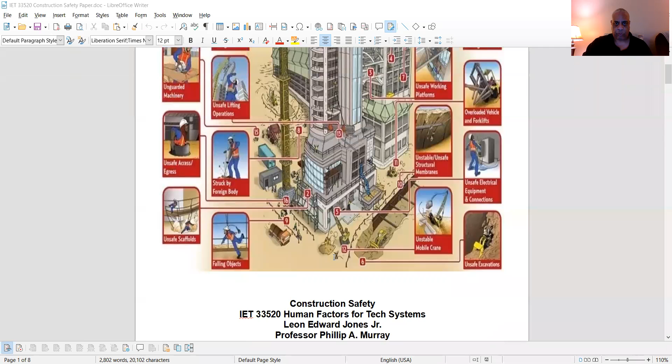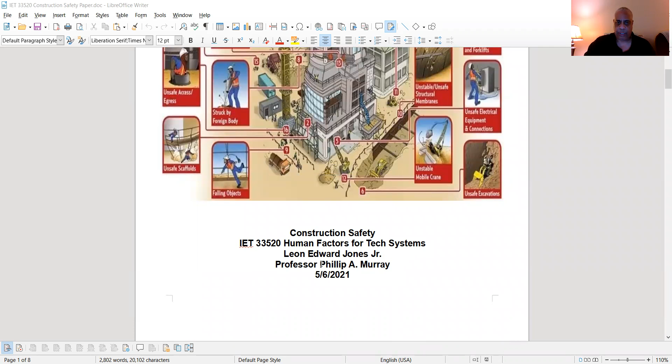But when it comes to safety, let me share my screen with you all. This is a paper that I wrote, Construction Safety, from my IET 33520 class at Purdue University, Human Factors for Technical Systems. I'm going to bring you the abstract, the introduction, the construction hazards, the comparison between the construction industry and the general industry, ways to improve construction safety.

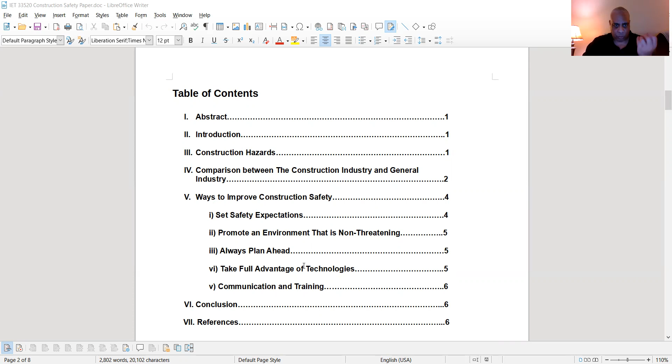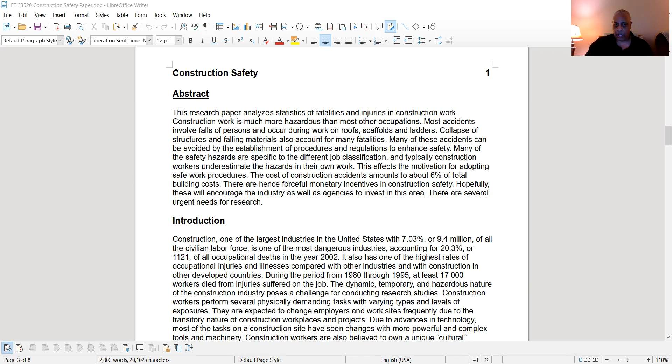I'm going to tell you how to set safety expectations, how to promote an environment that is non-threatening, also planning ahead, take full advantage of technologies, communication, and training. I'm going to conclude by summarizing this project on construction safety, and I'm going to show you all of the references I used to write this paper. So now we deal with construction safety. Again, construction safety is very pertinent. Let me open it up for you.

This research paper analyzes statistics and fatalities in construction work. As I said before, construction work is much more hazardous than other occupations. Why? Because most accidents involve falls of persons, and they basically occur during work on roofs, scaffolds, and ladders. Collapse of structures and falling materials also account for many fatalities. Many of these accidents can be avoided by the establishment of procedures and regulations to enhance safety.

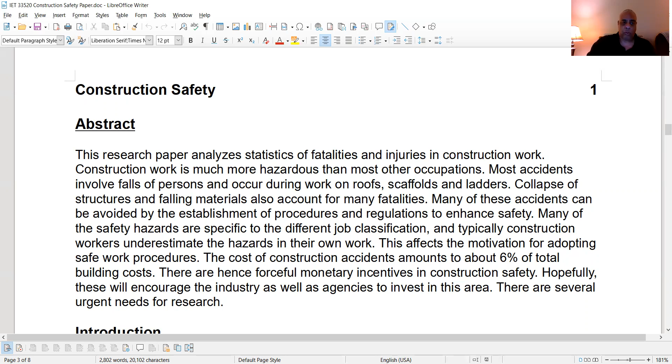Many of the safety hazards are specific to the different job classifications, and typically construction workers underestimate the hazards in their own work. This affects the motivation for adopting safe work procedures. The cost of construction accidents amounts to about 6% of total building costs. There are hence forceful monetary incentives in construction safety. This will help encourage the construction industry as well as agencies to invest in this area. So there are several needs for this research.

In my introduction, I tell you about construction. It is one of the largest industries in the United States, with 7.03% or 9.4 million of the civilian labor force. It is one of the most dangerous industries, accounting for 20.3% or 1,121 of all occupational deaths in 2002. It has one of the highest rates of occupational injuries and illnesses compared to other industries and with construction in other developed countries. During the period from 1980 through 1995, at least 17,000 workers died from injuries suffered on the job.

The dynamic, temporary, and hazardous nature of the construction industry poses a challenge for conducting research studies. Construction workers perform several physically demanding tasks with varying types and levels of exposures. They are expected to change employers and work sites frequently due to the transitory nature of construction workplaces and projects. Due to advances in technologies, most tasks on a construction site have changed with more powerful and complex tools and machinery. Construction workers are also believed to own a unique cultural mindset towards the perceptions of different levels of hazards.

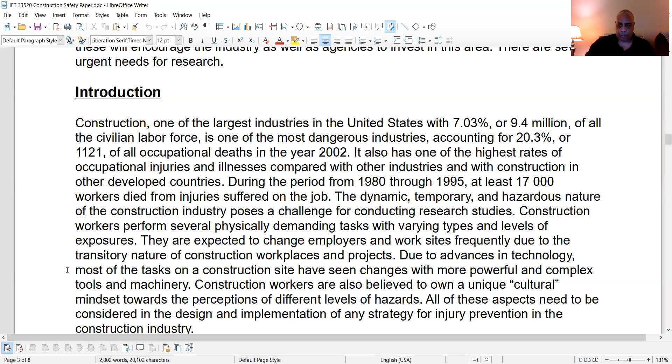As I point to the construction hazards, much research has been conducted to understand the nature of construction work, because it is known that construction workers are exposed to a wide range of hazards. Construction sites are generally multi-employer work sites, so safety responsibilities can become decentralized with many contractors and tradesmen coming and going off the construction site.

Construction projects are fast moving, which increases the likelihood for hazards to be overlooked. Problems often exist with workers and the work site. So together, all of this adds up to a dangerous environment where incidents are multi-causal in nature.

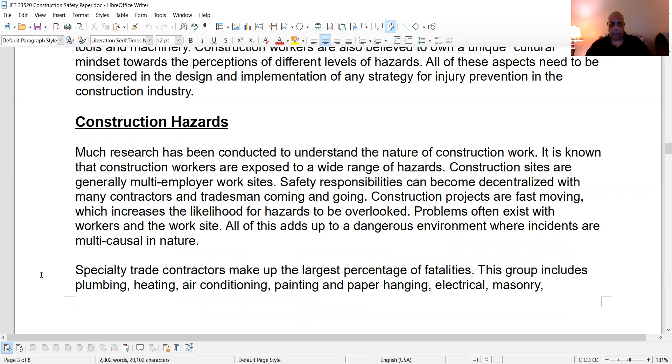When we deal with contractors, specialty trade contractors make up a large percentage of fatalities. The group of specialty contractors includes masonry, painting and paper hanging, electrical, plumbing, heating, ventilation, and air conditioning, carpentry, concrete work, steel work, and excavation work.

You also have heavy construction and general building contractors, which split the remaining percentage. General building contractors include residential, industrial, and non-residential contractors. Heavy construction work includes highway and street, bridge, tunnel, water, sewer, and utility.

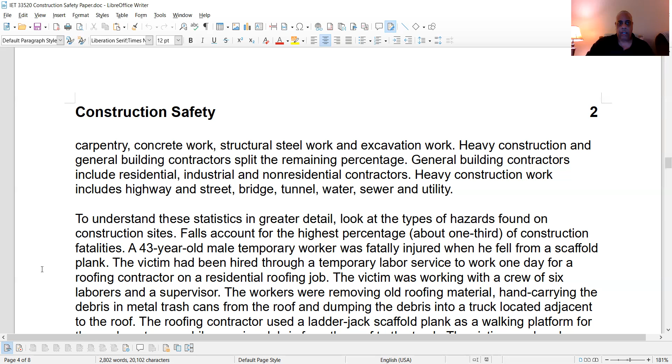To understand these statistics in greater detail, look at the types of hazards found on construction sites. Falls account for the highest percentage, about one-third of construction fatalities.

Here's a scenario. A 43-year-old male who was a temporary worker was fatally injured when he fell from a scaffold plank. The victim had been hired through a temporary labor service to work one day for a roofing contractor on a residential roofing job.

The victim was working with a crew of six laborers and a supervisor. The workers were removing old roofing material, hand carrying the debris in metal trash cans from the roof and dumping the debris into a truck located adjacent to the roof.

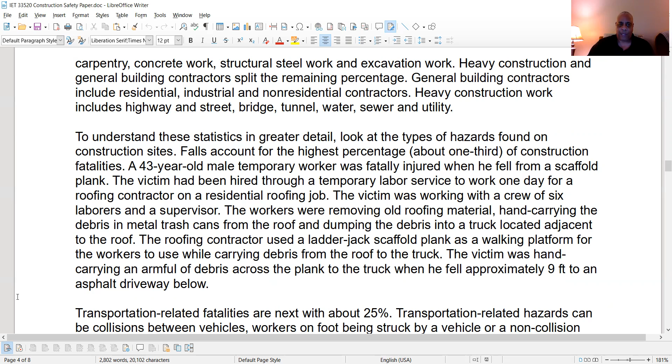The roofing contractor used a ladder jack scaffold plank as a walking platform for the workers to use while carrying debris from the roof to the truck. The victim was hand carrying an armful of debris across the plank to the truck when he fell approximately 9 feet to an asphalt driveway below.

Here's another hazard. You just heard of falls. Transportation-related fatalities are next with about 25%. Transportation-related hazards can be collisions between vehicles, workers on foot being struck by a vehicle, or a non-collision event such as a rollover.

Shadow vehicles, or pilot vehicles, provide notice to approaching traffic and physical protection of workers in traffic situations. Vehicles are supposed to have backup alarms and backup cameras to help reduce collisions.

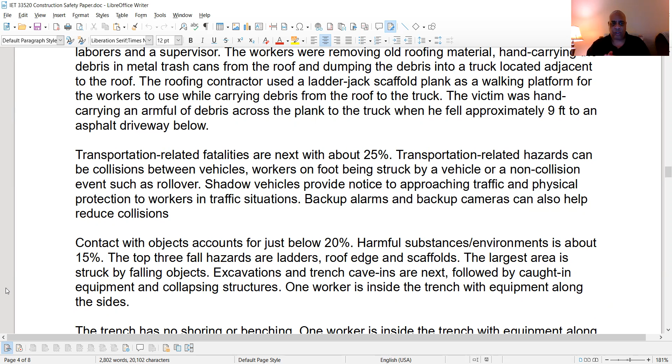Contact with objects accounts for just below 20%. Harmful substances and environments account for about 15%. The top three fall hazards are ladders, roof edge, and scaffolds.

The largest area is being struck by falling objects. Now, something else you need to understand: if you're doing construction and working in a trench, you're going to deal with excavations and trench cave-ins, followed by caught-in equipment and collapsing structures.

One worker is inside the trench with equipment along the sides. The trench has no shoring or benching. One worker is inside the trench with equipment along the sides. The trench has no shoring or benching.

When you are digging a trench, this is why you have to have shore boxes and ladders. OSHA wants ladders placed 25 feet from one another. When you are doing benching, I prefer having a nice 2-to-1 slope, or even a 3-to-1 slope, which we call benching. That helps prevent cave-ins. And besides cave-ins, there's also electricity.

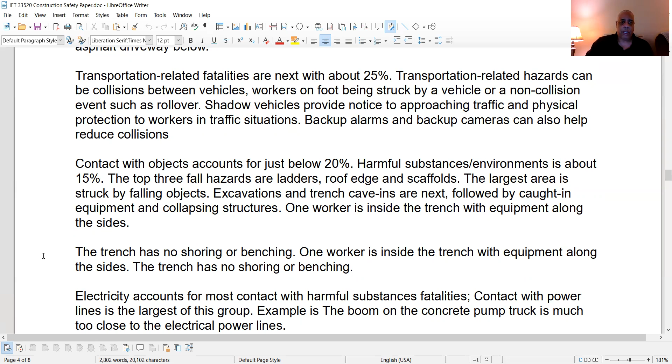Electricity accounts for most contact-with-harmful-substances fatalities, because contact with power lines is the largest of this group. An example is the boom on a concrete pump truck being much too close to power lines. That's why you have to put up signs that say overhead power lines.

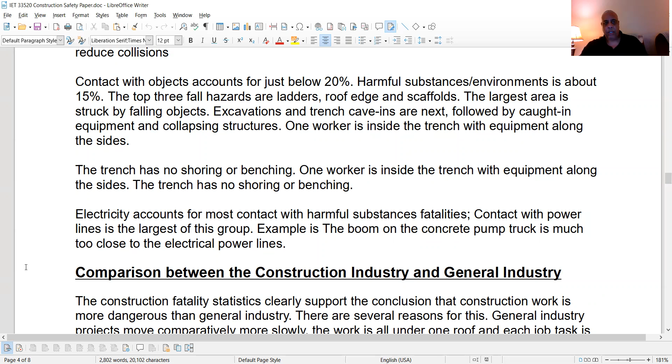Now let's compare the construction industry and the general industry. The construction fatality statistics clearly support the conclusion that construction work is more dangerous than general industry. There are several reasons for this.

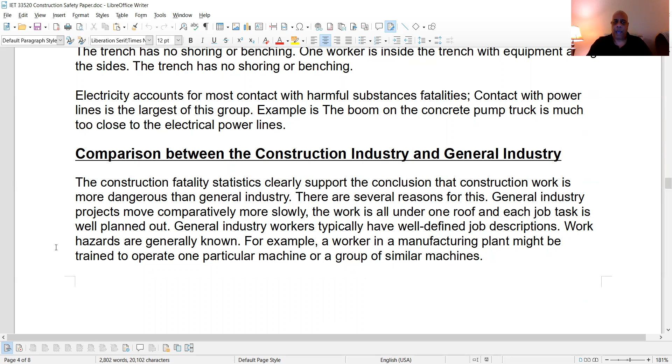General industry projects move comparatively more slowly, and the work is all under one roof, with each job task well planned out. General industry workers typically have well-defined job descriptions, whereas work hazards, for the most part, are generally known. For example, a worker in a manufacturing plant might be trained to operate one particular machine or a group of similar machines.

By comparison, construction workers are exposed to a wide range of hazards such as electricity, toxic substances, working at heights, moving vehicles, trenches, chemicals, and of course, confined spaces. So no two building projects are alike, and projects move comparatively quickly, so work tasks and hazards can be unpredictable. The dynamic environment makes it difficult to create safe, stable work zones.

Other differences exist as well. And here they are. Wow.

You have to understand construction work is physically demanding, so many construction employees work outdoors and must endure adverse weather conditions. High worker turnover, temporary workers, and day workers make it difficult to maintain a well-trained workforce. So workers may be unfamiliar with their work and lack the necessary skills or lack understanding due to language barriers.

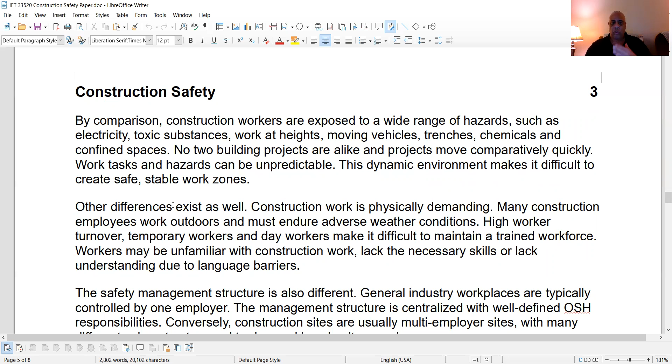The safety management structure is also different because in general industry, workplaces are typically controlled by one employer. The management structure is centralized with well-defined OSH responsibilities - OSH meaning occupational safety and health responsibilities.

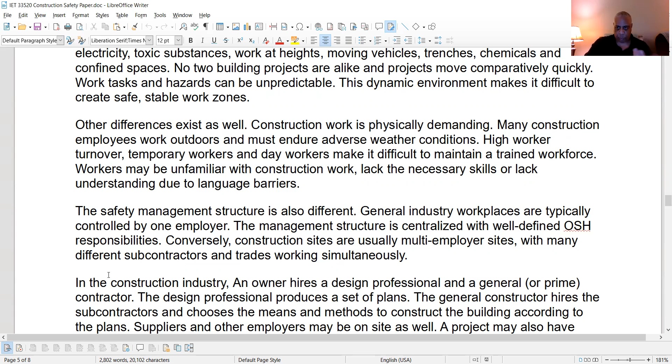Conversely, construction sites are usually multi-employer sites with many different subcontractors and trades working simultaneously. In the construction industry, an owner hires a design professional and a general or prime contractor. The design professional produces a set of plans. The general constructor hires the subcontractors and chooses the means and methods to construct a building according to the plans. Suppliers and other employers may be on site as well. A project may also have more than one prime contractor with its own subcontractors.

One of the famous types of contracts is design build, because it is yet another variation where contracting and design are done by the same firm. Also, the GC, which is the general contractor, oversees and is responsible for all of the work. This includes scheduling the work, quality of work, and site safety.

The general contractor or the GC defines the safety program and holds toolbox talks. A toolbox talk is basically when you go into a site, and in that session you have different safety briefings - you're going to have electricity, slips, trips, and falls, wash down stations. I'm just giving you examples. So that's what toolbox talks are.

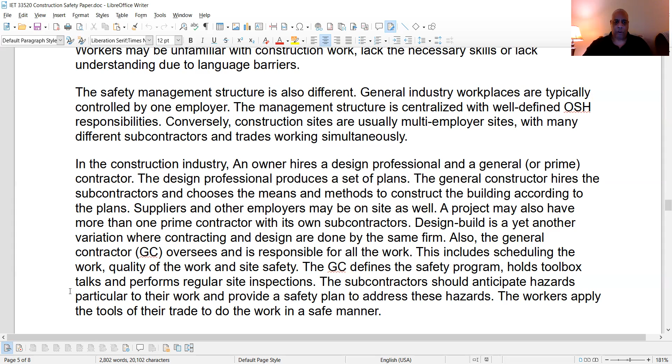And the GC also performs regular site inspections. Now, the subcontractors should anticipate hazards particular to their work and provide a safety plan to address these hazards. These workers apply the tools of their trade to do work in a safe manner. In reality, safety management becomes decentralized when multiple subcontractors are on a site.

One or more subcontractors may create a hazard that puts all employees, including their own, at risk. So hazards go uncorrected or undetected as the project moves quickly to meet deadlines. Workers, for the most part, frequently work on their own decisions when it comes to their safety. For example,

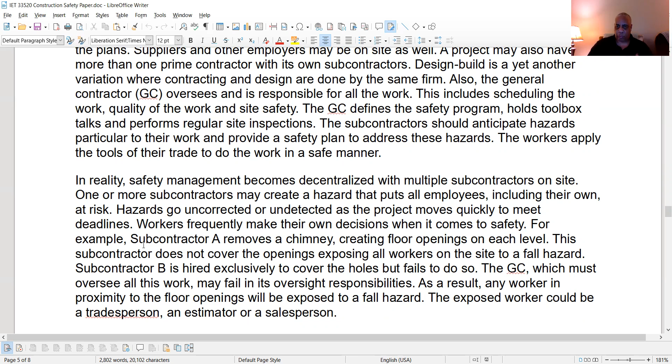Subcontractor A removes a chimney, creating floor openings on each level. This subcontractor does not cover the openings, exposing all workers on the site to a fall hazard. Subcontractor B is hired exclusively to cover the holes, but they failed to do so. So the general contractor, which oversees the work, may fail in its oversight responsibilities. As a result, any worker in proximity to the floor openings will be exposed to a fall hazard. The exposed worker could be a tradesperson, an estimator, or even a salesperson.

For example, a GC was hired for a bridge construction project. The GC hired a subcontractor for the steel work. One of the subcontractor's employees was installing cross beams between the girders. He was tied off to a horizontal lifeline, while at the same time, the general contractor's employees were installing tongue and groove planking between the girders. They were walking back and forth on the planking without fall protection.

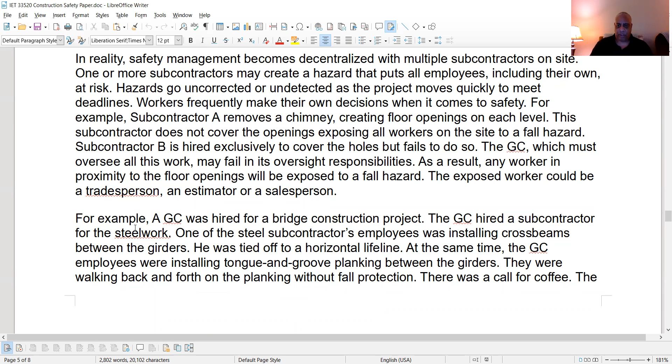It was a call for coffee. The GC's employees went for coffee, leaving a small section of planking at the far end unfinished. They did not place a cover, guardrail, or warning tape at the opening. The steel worker saw what he thought was a complete plank walking surface. He unhooked and walked in the same direction as the other workers. It was nighttime and there were lights shining toward him. He did not see the open hole created by the unfinished planking and fell 20 feet to the ground.

This is why you have to have your lifelines, your lanyards, and you tie everything off. And if you're working at night, you also need to have flashlights and you have to alert each other. It is up to everybody - I know the GC is responsible for overseeing a project, but safety is everyone's responsibility.

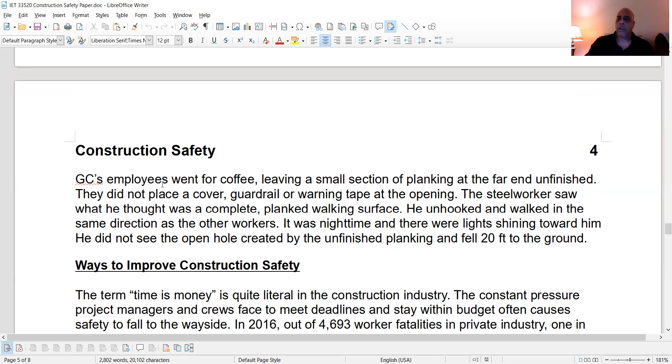I repeat again, safety is everyone's responsibility. So I've come up with ways to improve construction safety.

Now, the term time is money is quite literal in the construction industry. The constant pressure project managers and crews face to meet deadlines and stay within budget often causes safety to fall to the wayside. So in 2016, out of right around 4,700 worker fatalities in the private industry, 1 in 5 were in construction. So implementing each of these strategies can help improve health and safety in construction on any job site.

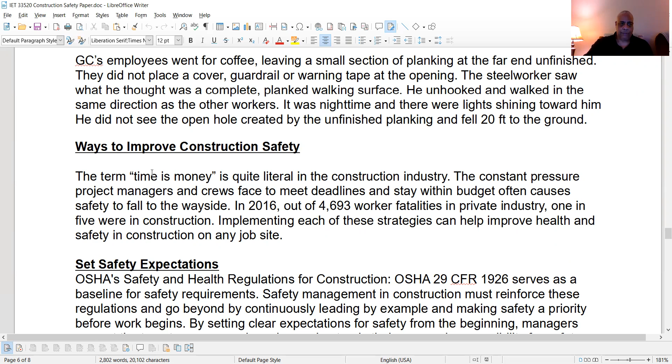Set safety expectations. OSHA's safety and health regulations for construction, OSHA 29, CFR 1926, serves as a baseline for safety requirements. Safety management in construction must reinforce these regulations and go beyond by continuously leading by example and making safety a priority before work begins.

By setting clear expectations for safety from the beginning, managers can set the tone to ensure each worker understands their personal responsibility for safety. And when that happens, everyone will be helping one another toward a common goal of preventing injuries.

As a safety manager, it is important to walk the talk when it comes to workplace safety and health. The example you set and the way you talk to workers about safety has a huge impact on a company's safety and health program, safety culture, and ability to reduce injury and illness.

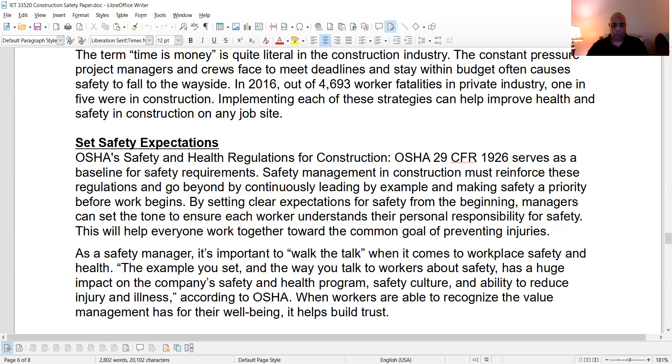According to OSHA, when workers are able to recognize the value management has for their well-being, in the end it helps build trust. Understand some workers may never interact with senior management, but it's found that these employees are more likely to value and internalize safety messages when they are occasionally delivered by higher level management rather than passed down in a chain of command.

Make it clear that it is everyone's responsibility to follow rules, procedures, and best practices to prevent accidents on the job site. So incorporate safety language into policies and procedures so it becomes ingrained as a natural part of a worker's daily routine.

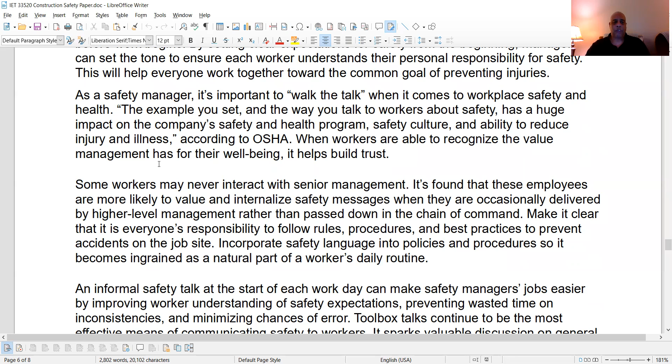An informal safety talk at the start of each day can make safety managers' jobs easier by improving worker understanding of safety expectations, preventing wasted time on inconsistencies and minimizing chances of error.

Again, toolbox talks continue to be the most effective means of communicating safety to workers. Why? Because they basically spark valuable discussion on general safety and information about safer tools, equipment, materials, and of course, processes.

Utilize OSHA's website for a variety of topics from emergency planning, tool and equipment safety, trench boxes, let's put ladder safety in there, PPE. PPE stands for personal protective equipment, and more to help create or obtain a presentation.

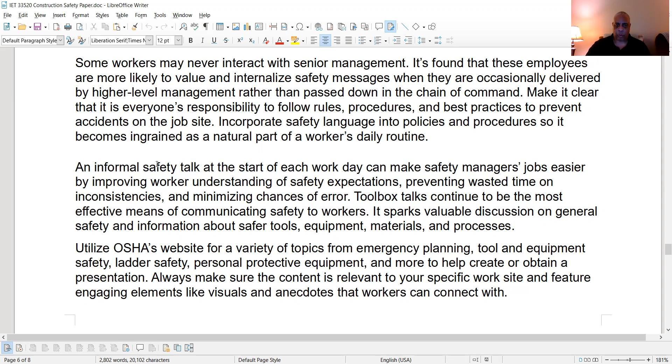Always make sure the content is relevant to your specific work site and feature engaging elements like visuals and anecdotes that workers can connect with.

Again, promote an environment that is non-threatening. Always encourage employees to speak up when they see that something is going wrong, because this can significantly help avoid injuries, incidents, and fatalities.

So to increase chances of participation, ensure workers feel comfortable to ask questions and raise safety concerns without fear of retaliation or bullying. This will make it easier and quicker to address issues head on to prevent them down the road.

Again, OSHA finds that managers avoid giving feedback to prevent confrontations. So if improvements to a worker's performance can be made, approach them in a constructive, positive way. Make sure to avoid judgmental statements and criticisms and focus on the behavior itself, not the person and their values or personality.

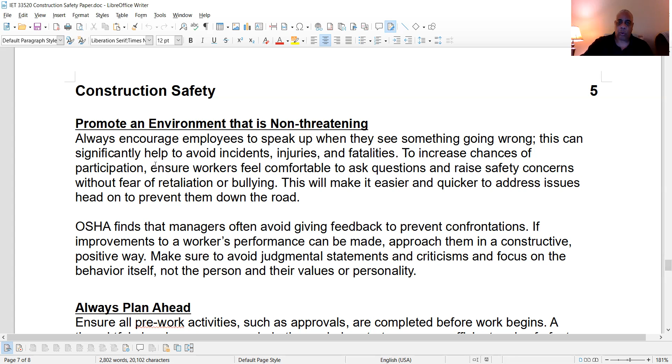Again, always plan ahead. Ensure all pre-work activities such as approvals are completed before work begins. So a thoughtful planning process can help the workday start on a more efficient and safe foot.

Implement zoning to block off areas where certain tasks will take place, install nets and catch platforms, and apply any other safety measures. Stage and stock each work area with the necessary tools, PPE, and equipment before the workday begins. This will make it easier for workers to access what they need.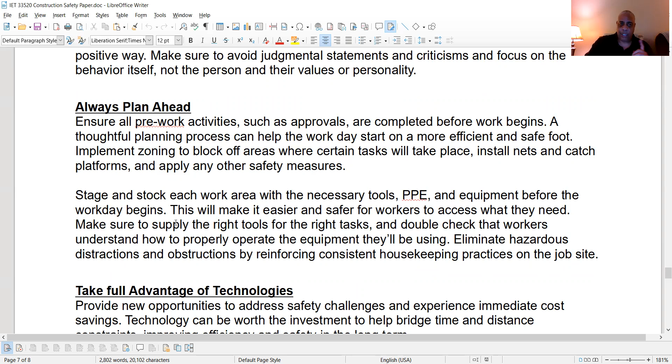Also make sure to supply the right tools for the right task and double check that workers understand how to properly operate the equipment they'll be using. Eliminate hazardous distractions and obstructions by reinforcing consistent housekeeping practices on site, and also take advantage of technologies.

This can be done by providing new opportunities to address safety challenges and experience immediate cost savings. Technology can be worth the investment to help bridge time and distance along with constraints. It will also improve efficiency.

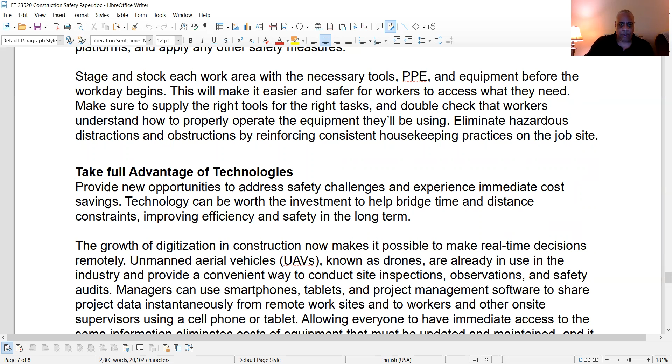It will help efficiently improve your safety, but it's going to also improve efficiency, and your safety will be helped in the long term. Now, the growth of digitization in construction now makes it possible to make real-time decisions remotely.

UAVs, which are unmanned aerial vehicles known as drones, are already used in the industry, and they provide a convenient way to conduct safety site inspections, observations, and safety audits.

Managers can use smartphones, tablets, and project management software to share project data instantaneously from remote work sites. Again, this is very big. With the technology, we all have smartphones, we all have tablets, and construction safety software has already been implemented into the software.

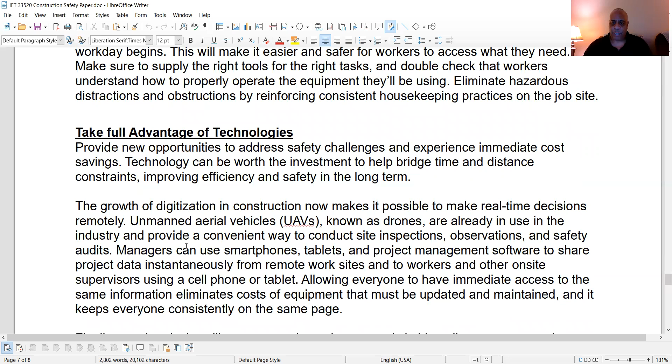And what happens? You can share project data instantaneously from remote work sites, and when I mean remote work sites, you don't even have to be there. You can share it to workers and other on-site supervisors by the use of a cell phone or tablet. That allows everyone to have immediate access to the same information, which eliminates cost of equipment that must be updated and maintained, and keeps everyone consistently on the same page.

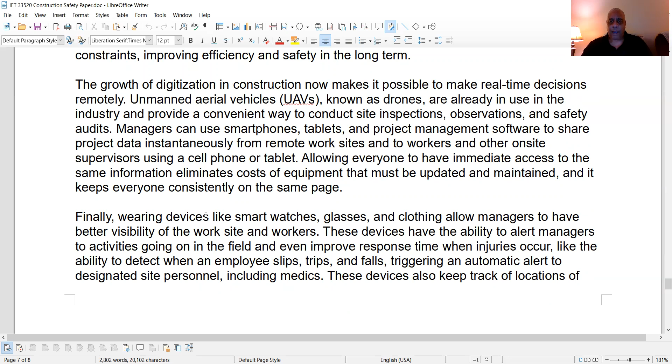Finally, wearable devices like smartwatches, glasses, and clothing allow managers to have better visibility of site workers. These devices have the ability to alert managers to activities going on in the field and even improve response time when injuries do occur, like the ability to detect when an employee slips, trips, and falls, triggering an automatic alert to designated site personnel, including medics. These devices will also keep track of locations of workers and procedures on the job site.

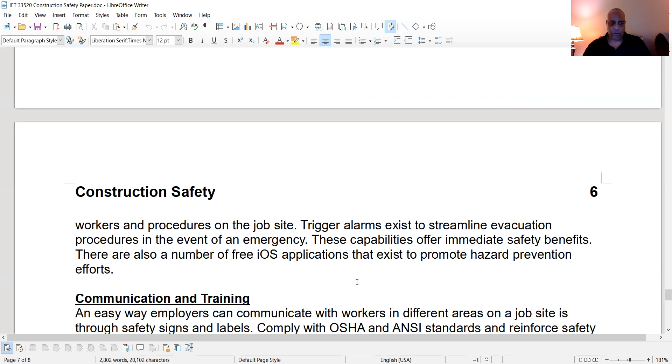Trigger alarms exist to streamline evacuation procedures in the event of any emergency, so these capabilities offer immediate safety benefits. There are also a number of free iOS apps for iPhone that exist to promote hazard prevention efforts, and also communication and training.

An easy way employers can communicate with workers in different areas on a job site is through safety signs and labels. Comply with OSHA and ANSI standards and reinforce safety anywhere on a work site with easy to install pre-made construction labels and signs. The most obvious benefit, of course, is that training prevents injuries and fatalities.

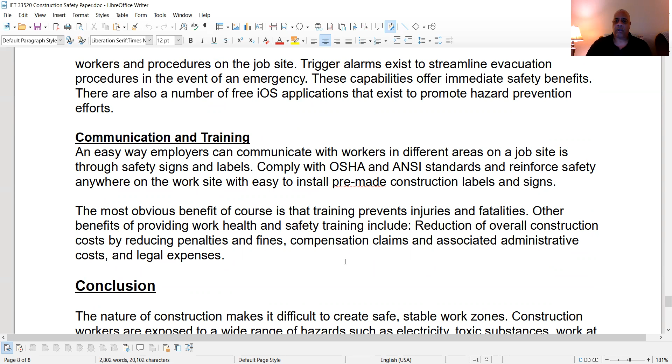Other benefits of providing work safety and health training include reduction of overall construction costs by reducing penalties and fines, compensation claims, and associated administrative costs, along with legal expenses.

So in conclusion, what I came up with is the nature of construction makes it difficult to create safe, stable work zones. Construction workers are exposed to a wide range of hazards such as electricity, toxic substances, work at heights, moving vehicles, trenches, confined spaces, and chemicals. Understand that construction projects move quickly and hazards can be unpredictable.

So workers must endure physically demanding work regardless of the weather, and the work is very, very hazardous. And when you're in construction, you could be assigned to any project on the site. So what I'm saying is raising any type of awareness can help promote safety.

Management can conduct a safety stand down by breaking for a toolbox talk, discussing job hazards and inspecting safety equipment. Workers should work safely according to their training and alert other workers of any open hazards that they find. Owners should only hire contractors with good safety records. Last but not least, owner presence and involvement will help to show a commitment to safety.

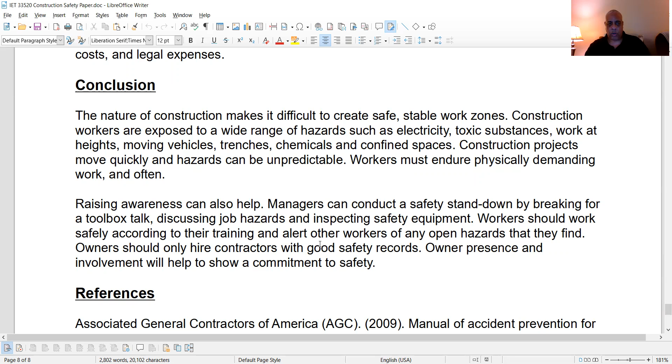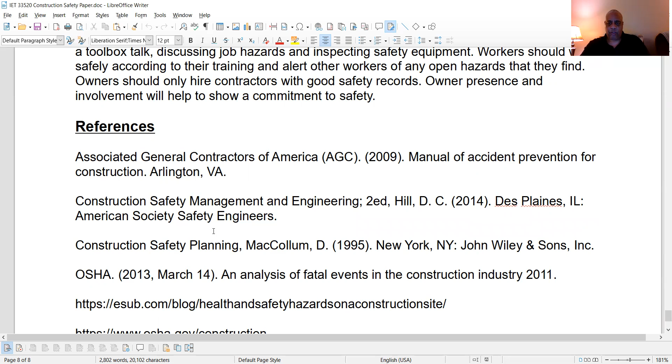And if you want to know where I got all the information from, here are my references: from the AGC, the Associated General Contractors of America, 2009 Manual of Accident Prevention for Construction; the Construction Safety Management and Engineering text, second edition, 2014, Des Plaines, Illinois, from the American Society of Safety Engineers; Construction Safety Planning by MacCollum D, 1995, New York, New York; of course OSHA, Analysis of Fatal Events in the Construction Industry, 2011; ESUB is a good site; and of course OSHA. But overall, construction is a great occupation.

However, if you want to live to see another day, always practice safety. And when you practice safety, you reduce insurance costs, you reduce injuries, and you reduce fatalities.